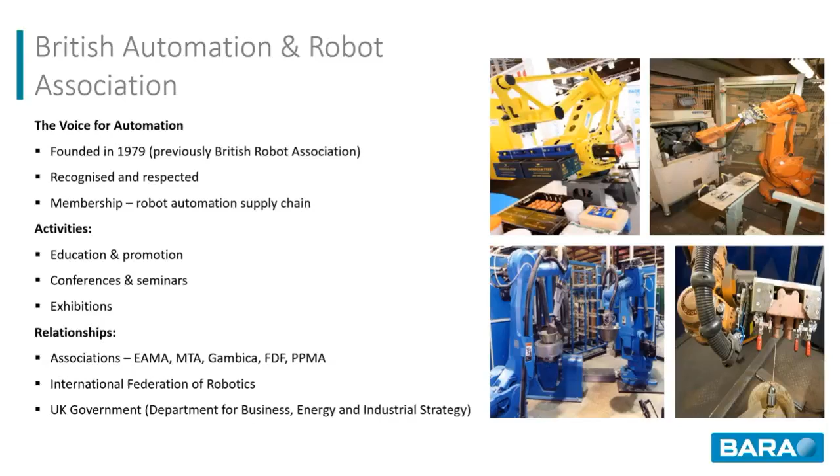There are many challenges facing UK manufacturing, particularly in the area of productivity. The Office for National Statistics did some research and made a statement: 0.3% is the estimated average annual increase in UK productivity in the decade or so since the financial crisis. Clearly, to be competitive, we need to increase productivity. I think this statistic is rather shocking and gives a clear indication of the challenges which UK industry is facing.

We've touched on the fact that there are certain challenges facing manufacturing in the UK. Let's have a look at some of them in detail.

Productivity. I think we've touched on that, and I don't think I've got anything more to add other than we need to do something to overcome the relatively low rates we are seeing.

Brexit. We're probably all sick to death of hearing about Brexit. I won't touch on that. We know there are challenges. Hopefully we're starting to overcome them, but yeah, no more to be said.

COVID-19, what a disaster that's been. Many manufacturing industries ceased production completely, others were just ticking over, yet in certain areas there's actually been a boom. A number of companies have ended up employing more people, increasing production, extending manufacturing facilities. So not an absolute total disaster, not good by any stretch of the imagination, but nothing else to add there, I don't think.

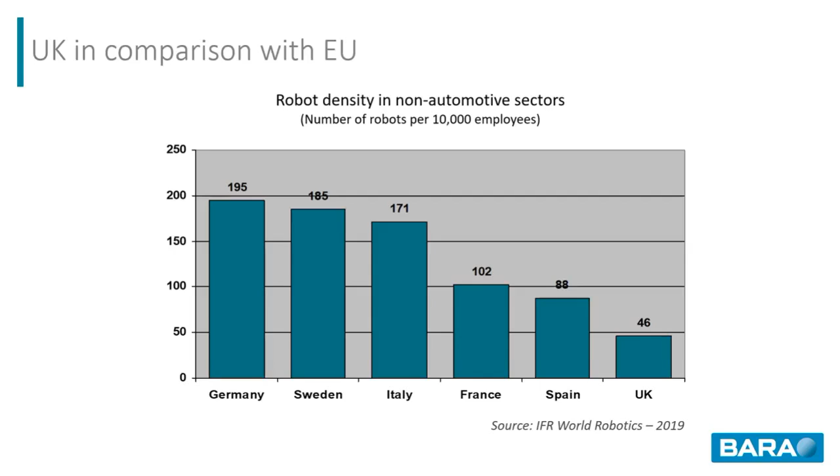This obviously has an effect on our ability to compete effectively, and has a dramatic effect on productivity. So while we could beat some of them in the field of football, clearly not all of them, in the field of robotics and automation we are getting thrashed.

So if you thought the European position was bad, let's have a look at the global position. The global average is 113 robots per 10,000 employed. This is for all industries, including automotive.

You can see that way out to the left, we've got Singapore up at 918. Now, working our way across all these major manufacturing countries, what you'll see is that the UK doesn't even appear in the top 20 on this chart. In fact, the UK only ranks 24th in the world with a robot density of 89 units.

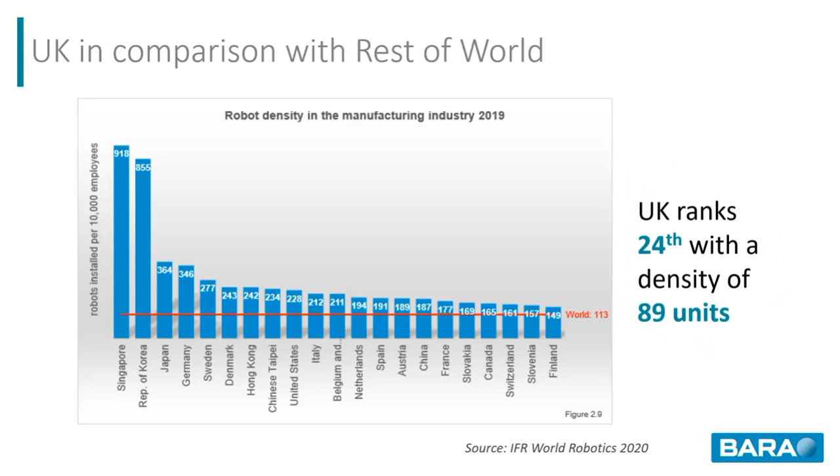However, not everything is total doom and gloom. The automotive sector has obviously been a major user of robots and automation for many, many years. And over the last 9-10 years, what we've found is that productivity has grown within automotive quite significantly.

Many companies there now produce 56% more per hour than they did in 2009. This really has come about as a result of major investments into new robotic and automation systems. What they've also found is that the introduction of new technology has also created thousands of jobs.

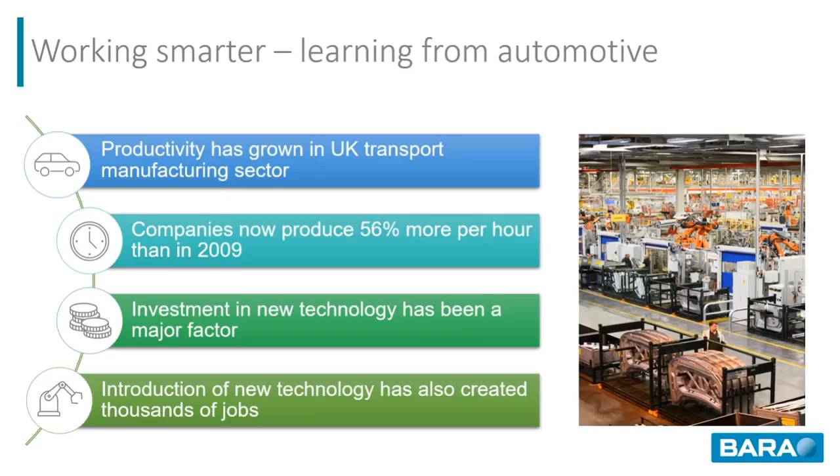Perhaps what we ought to do is learn from the automotive sector and apply those lessons into other manufacturing sectors in the UK.

There was a study done recently by the Copenhagen Business School looking at automation, productivity and employment across quite a wide range of manufacturing sectors, and they compared quite a large number of EU countries and also Japan. Sadly, one of the main findings they found is that the UK was in the last place for productivity in almost every sector they looked at, which is obviously quite depressing.

However, another factor which came out of the work they did was that if the UK was to adopt more robotics and automation, and if it became then as automated as the most productive country, then we would see over a 22% increase in productivity. The effect of that on employment, in short term, potential decrease, but longer term, an increase of nearly 7.5%.

So if we go down the road of robotic automation, what benefits can we see? Well, we get better utilization of space and more efficient use of energy. Improved productivity as a result of increased yield, improved utilization of other equipment, better utilization of staff, taking them away from the dull, boring, repetitive jobs and putting them into places where they can add value.

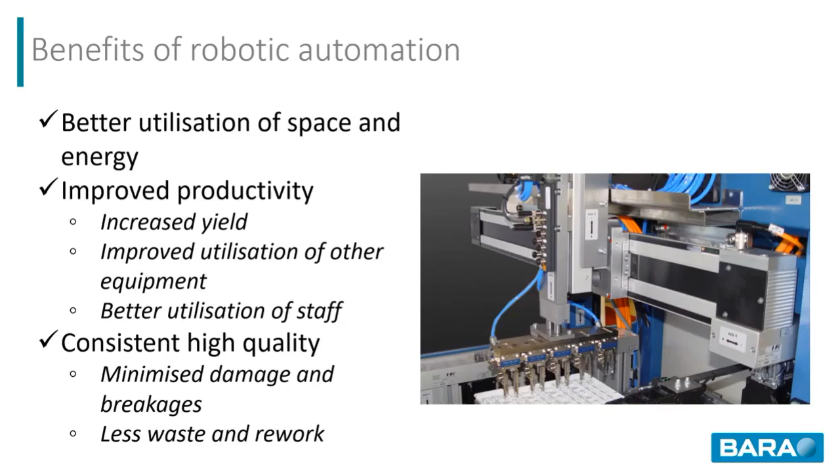Improve competitiveness. Flexibility, you can get quick changeovers. Product redesign can be taken on relatively quickly. The robot tooling can be changed easily, and robot programs can be changed very, very readily.

You can extend production hours. A robot will work 24/7. It can be lights on, lights off, heating on, heating off. It doesn't care, it will just keep on working.

Improved health and safety. A lot of the repetitive jobs have got a potential risk of RSI, so that can be removed. Manual handling, manual lifting, there are dangers associated with that.

More rewarding jobs. People working with robots, programming robots, higher skill levels, much more satisfying.

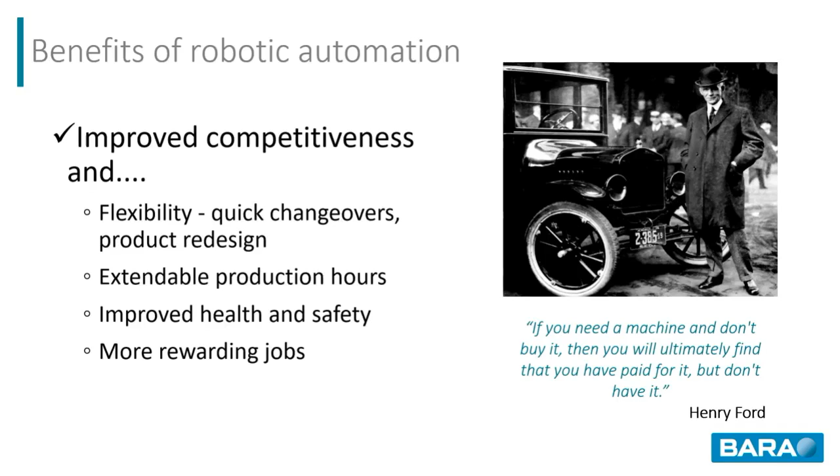There's a saying attributed to Henry Ford: if you need a machine and don't buy it, then you will ultimately find that you have paid for it but don't have it. What he's alluding to is that if you don't put automation in, you end up paying more for your piece parts. So in the end, you've actually paid what it would have cost you to buy a machine, but you don't have that asset. Perhaps not a very wise decision.

There are many opportunities for putting in automation in the UK. Applications such as machine tending, welding - there are very many nice robot welding cells - picking, high-speed picking, packing, palletizing. Any type of task which is boring, repetitive, mundane, or dangerous is a perfect opportunity for automation.

Companies who put in automation do gain a really good competitive advantage. They could achieve better financial returns, which in turn means they are more efficient, more productive, more profitable, which in turn leads to taking on more business, so they grow. As they grow, they give more employment opportunities, bring in more jobs.

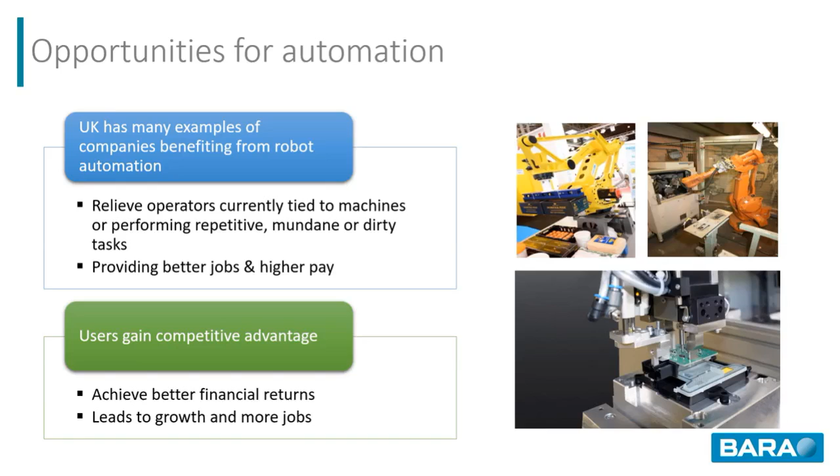Once we've decided which of the automation opportunities we want to follow, we then need to consider which is the preferable type of robot for the application. At the moment, typically you could choose between either a collaborative robot or an industrial robot. Collaborative robots, commonly known as cobots, are relatively new to the market, but there is some strong interest being shown from certain manufacturing sectors.

One aspect is that cobots can reduce the fear factor of installing robots. It is a type of robot which can be used collaboratively, working side by side with humans. It gives us great flexibility, and they're relatively easy to install and use. They can be used for operations which require direct collaboration between humans and robots. For example, an operator could assemble certain parts which require manual dexterity, which robots just can't have, then pass them to the robot, who can take over and conduct other tasks on them which are repetitive, boring, mundane.

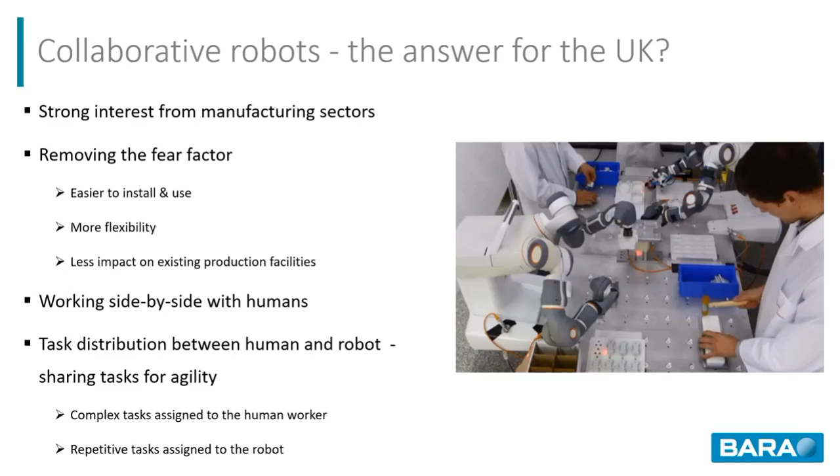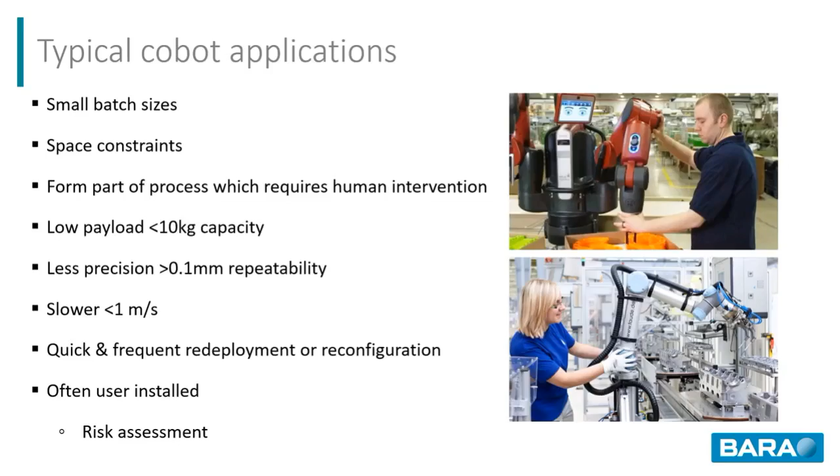The robot is then put into a manual mode. It will not be possible to run it in automatic mode. In manual mode it will run at typically around 10% of the rated maximum speed. The operator will be using a connected teach pendant with an inbuilt deadman switch, so they can work safely in close proximity to the robot.

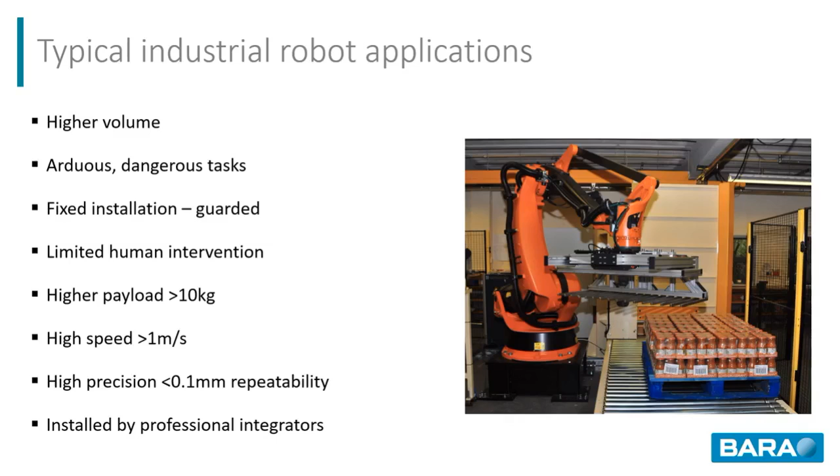Robots of this type are nearly always installed by professional robot integrators. If the thought of integrating robots is quite daunting, there is support available from BARA. If you get onto the BARA website, it's possible to download how-to guides. There are white papers on various aspects of robot operation. Also expertise and advice, and a listing of independent consultants who are available for advice.

There is also a new scheme which has recently been introduced by BARA in collaboration with the RIA, the Robotic Industries Association, which is an American-based organization. So we've collaborated with them to introduce the certified scheme for robot integrators.

So now we've gone through some of the background to robotic systems integration. How do we actually start the process? Firstly, I would suggest that you clearly define the objectives. What do you want to achieve? Is it to increase throughput, improve quality, reduce labour and costs? Or is it, as has happened to me, that you just want a robot to show your customers that you're a go-ahead company because you're automating?

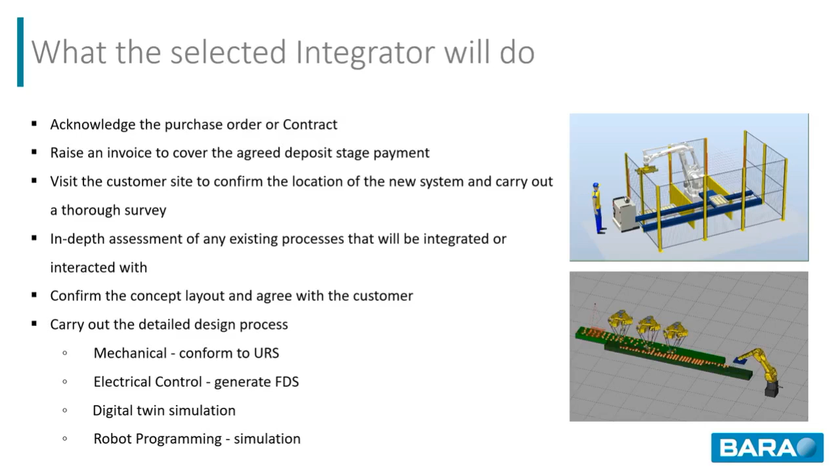So the output from robot simulations can be very, very useful to actually confirm that the concept is correct and will work properly in practice. What you will find is that every robot manufacturer does have simulation software which is available for their integrators.

Moving on, we'll then get to a stage of signing off the design and bringing about a design freeze. This may well trigger another stage payment with the end user.

Once the design has been finalised, we're then in a position to place orders for third-party equipment, for example the robots. However, on some relatively short lead time projects, it may be necessary to actually place orders for some third-party equipment before the design freeze.

Next stage, we should be able to release detailed drawings for manufacture of components and other sub-assemblies.

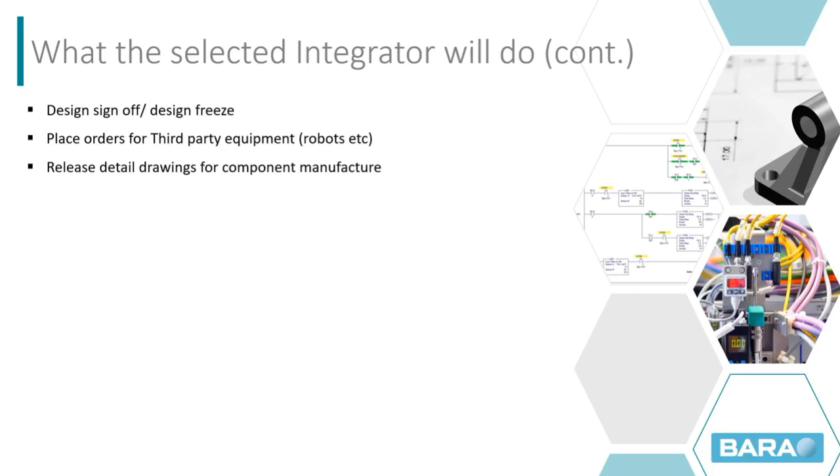One absolutely crucial thing which must take place is regular internal design reviews. Project managers should be keeping tabs on things, making sure that everything is running smoothly, the design is progressing to the point where it does fully conform with the URS, and making sure everything else is absolutely on track.

Equally, if possibly not more important, is to continue having regular project reviews with the customer or the end user. Ideally, they should have appointed a dedicated project manager so that there's an absolute continuity of communication.

As time passes by, components will be manufactured, fabrications made, systems painted perhaps, and it will get to the point where it's possible then to start assembling the system mechanically. Again, there may be a payment due triggered by starting to assemble.

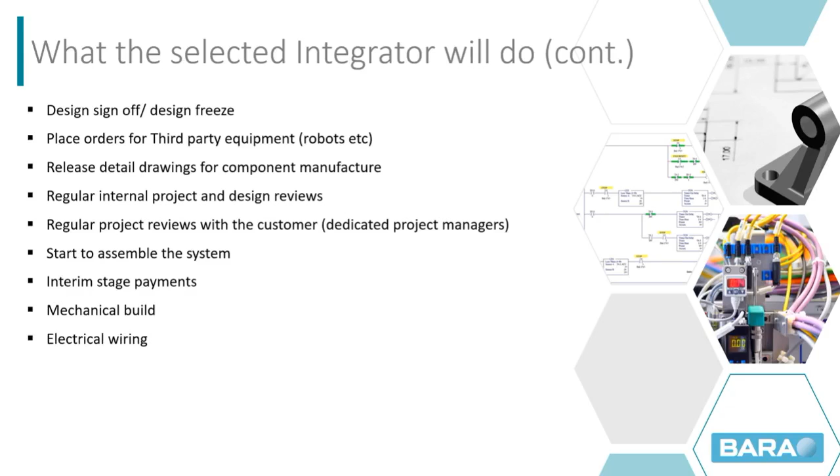Mechanical build continues. Then you get to the stage where electrical wiring can be put in place. Install the robots. Once we've got power on, you can then start to calibrate the robots.

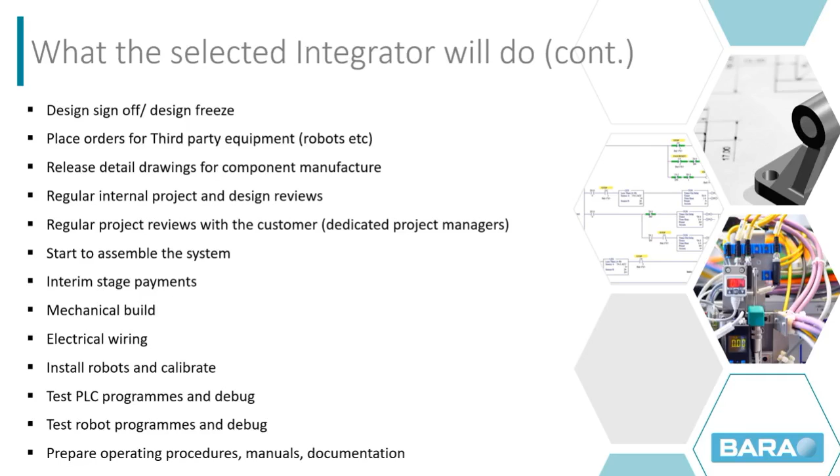Start testing PLC programs and debugging them. Then get to the stage where robot programs can be tested and debugged stage by stage. Don't forget, in parallel and in the background, there will be operating procedures to prepare, manuals to produce, documentation to keep on top of.

Then you will get to the stage where an internal pre-delivery inspection can be conducted. Here, you've got to make sure that the system is conforming to the performance requirements of the URS, that the FDS for the control system is being adhered to.

Crucial is doing a full risk assessment and safety check to ensure that the system does fully comply with ISO 10218 Part 2.

Once everything is satisfied, it'll be time to invite the customer along to conduct their pre-delivery inspection. They will perform a full performance check against the URS, and if everything is satisfactory, they'll sign off the system when it meets the specification. I would fully urge you, do not ship any system out of your works until it's been 100% satisfied. Prepare for shipment.